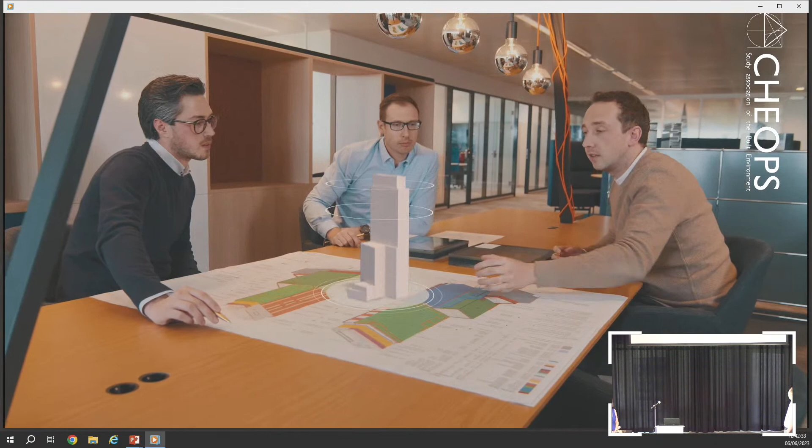City skylines, shaped by iconic statements of modern architecture. Glancing up at these shiny facades often feels magical, but it is not magic that creates these monuments of the future. At Scheldebouw, we know it takes expertise, experience, and devotion to create skyline-changing buildings. Creating something outstanding requires new ideas and tailor-made concepts that make them real. That's why we don't choose paved roads. We think in possibilities. We breathe challenge.

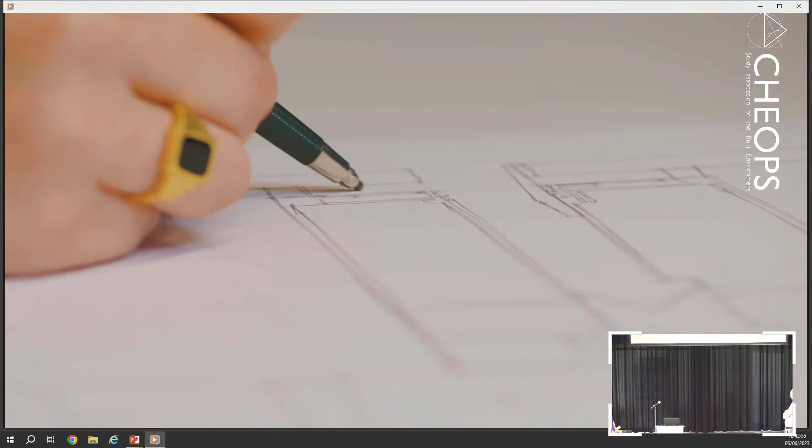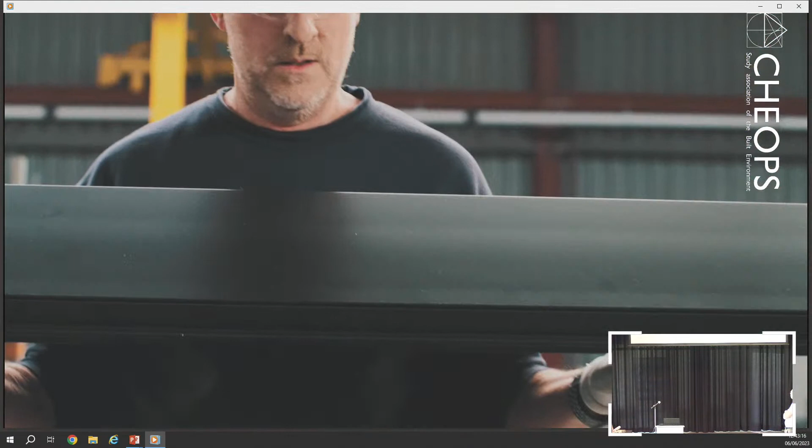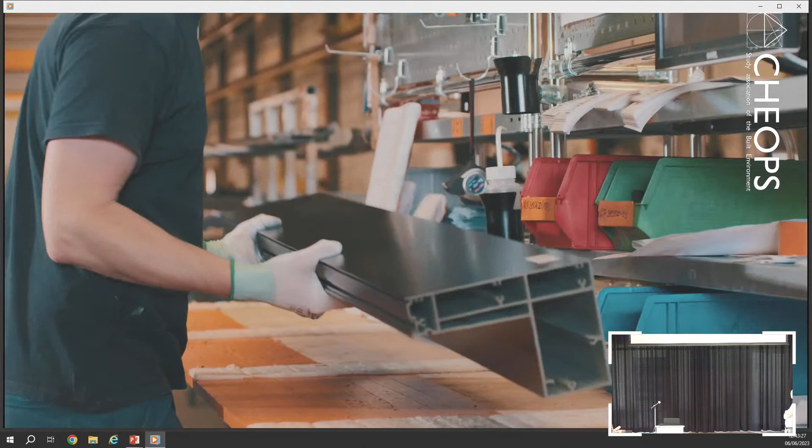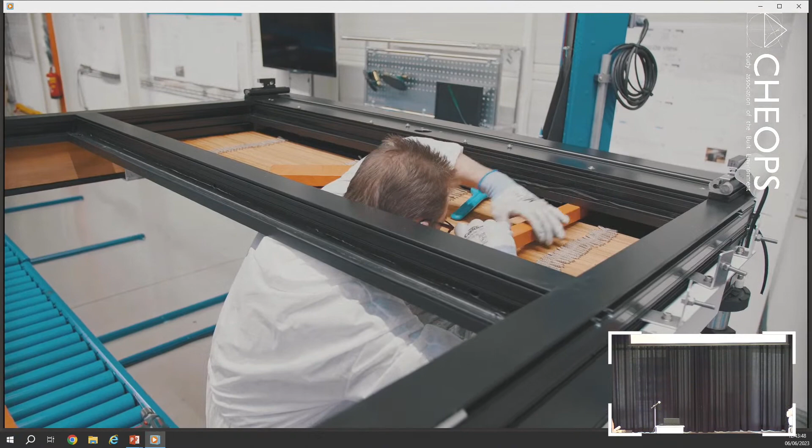And we reshape technology to create new visions. Our engineers design solutions that transform ideas into remarkable curtain walls that protect building inhabitants from the elements outside. We have an uncompromising focus on excellence, and we test our designs in ways that exceed your expectations. At the core of our manufacturing facility lies customization and a commitment to perfection. By tracking everything we do, we keep a tight grip on even the smallest detail. It's this kind of commitment to excellence that is reflected in the exceptional quality of our panels.

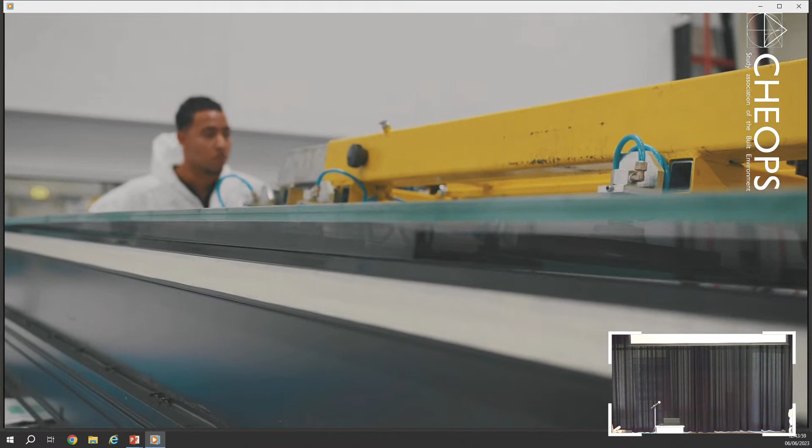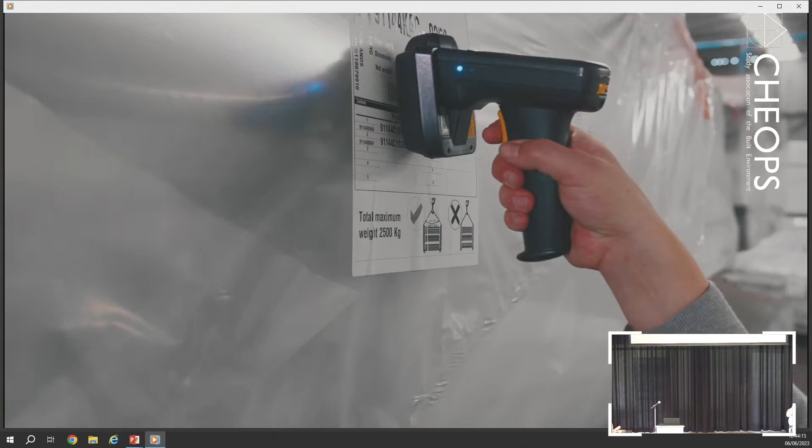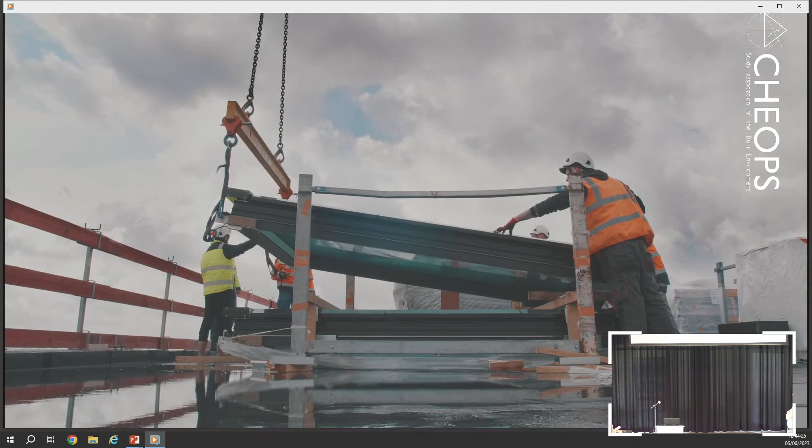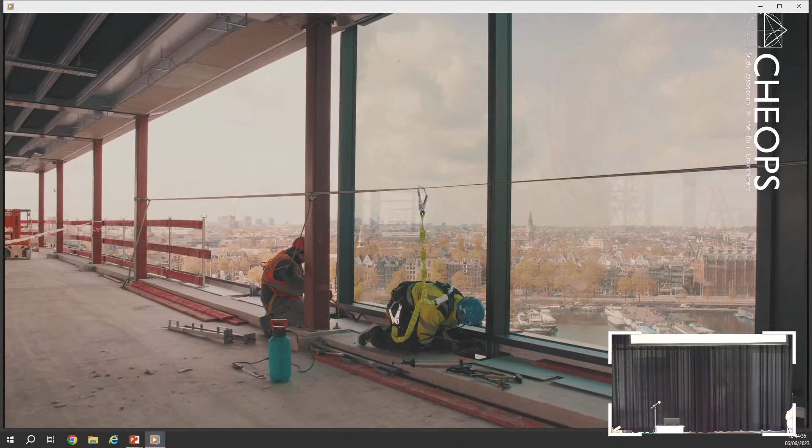In fact, excellence is of such importance to us that our assembly area maintains clean room standards. Driven by perfection, we leave nothing to chance. Our daily quality control makes sure every component complies with our quality standards. Our commitment extends far beyond our facility floors. Our large warehouse allows for meticulous planning on even the largest projects. On-site excellence is just as important to us. Our unitized panel installation minimizes time on site while guaranteeing thorough and precise installation. You might be wondering why we are so devoted to excellence. If the skyline of the future was your canvas, wouldn't you be?

So this shows a little bit what we do. We are part of the Permasteelisa group. This is a worldwide group of companies who specialize in customized facade designs.

So in a nutshell, what we do, we start off with architectural concepts. We discuss with architects, main contractors, developers, and we come up with a plan for them, how to engineer the facade. We source all the materials, we do all the engineering, all the calculations. We do all this in-house. We do all the fabrication, logistics to site, all the quality control, installation, and also the after-sales services. So we really do the whole story, A to Z, full package.

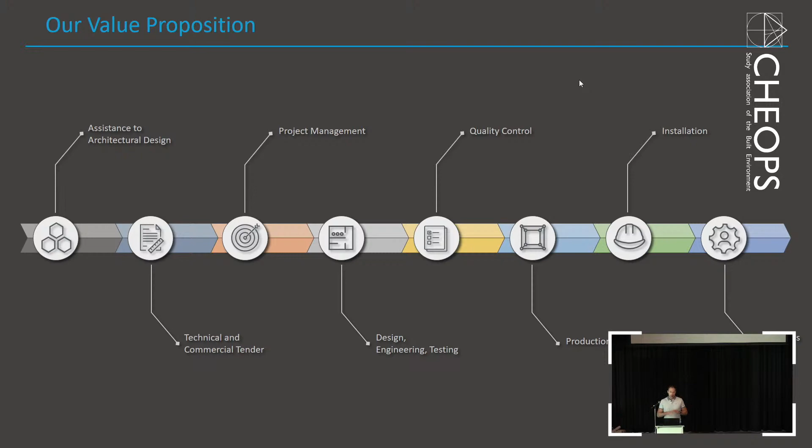Where do we do this? We are mainly, our main market is UK, London. They have most of our portfolio of buildings. We operate actually throughout Northern Europe, Scandinavia, Eastern Europe, Poland, Hungary. And sometimes we also have intercompany projects where we exchange projects in the USA or in the Middle East, where we help our sister companies executing these projects.

Where are we located? We have two companies in the Netherlands. One is in the south, in Limburg, in Heerlen, where we have a design office, and we have one in Middelburg at the coast in Zeeland, where we have production facilities and also engineering capacity. With those two operations, we serve the whole Northern European market.

Maybe making the link to sustainability: what we do is inherently sustainable. We have always done this, and we are tweaking it now to serve new sustainability ambitions on new projects. We only work with customized solutions, so we don't have off-the-shelf products.

Everything we do is fit for purpose for that specific project. We do not design anything that is not required. Everything is exactly for that specific project, with no excess material used—it's calculated exactly to the static and thermal demands.

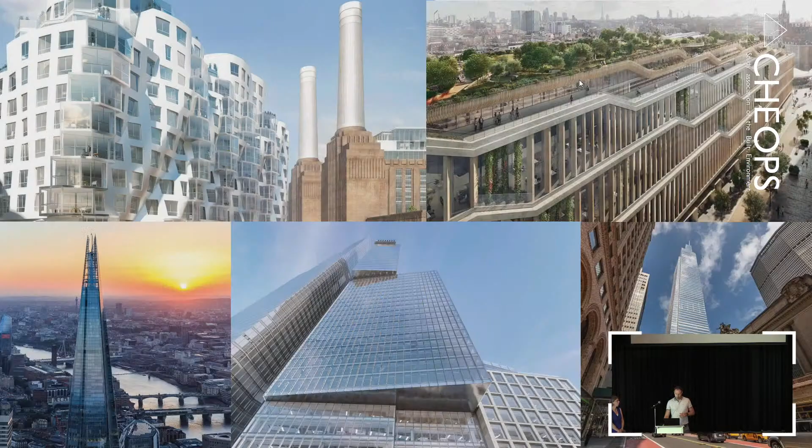The projects we do this for are very diverse. We do not define the principles of the building—the architect does that. Materials are prescribed to us, and we try to work with these materials, analyze them, and maybe offer something alternative to the client. There isn't one single type of project that we service.

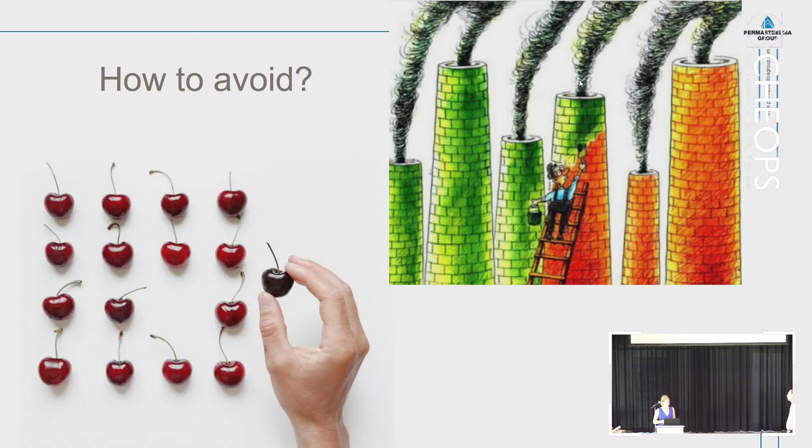And that is something I think we need to be aware of, and that is very hard to judge sometimes. So how do we avoid cherry picking and greenwashing in the world of sustainability? Because I think that is a struggle all of us have, balancing all these effects that maybe go in opposite directions. And it's a challenge we also have as a company.

The answer to that is LCA, a life cycle analysis. Of course, there can be a lot of discussion about the method, pros and cons, how to do this and how to do that. But on the other hand, it is the best method we have in industry. It's widely accepted, there are standards, and of course there's still discussions, but this is a way to balance all the environmental impacts a product has during its life cycle, in a systemized and standardized way.

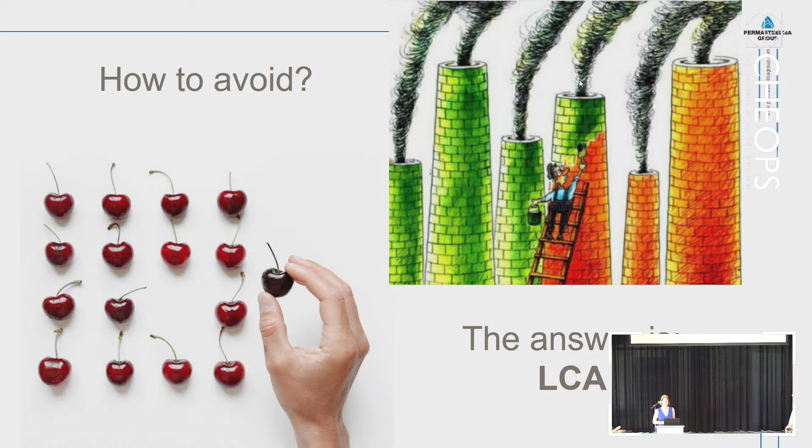So that is why we also embrace this method in our company, but the real challenge I think at the moment is to not let it turn into just another certificate, just another document that you put in your drawer, but how to turn this into action. That is something I think is very important, and I would like to show you how we do that, how we went on this journey at Scheldebouw.

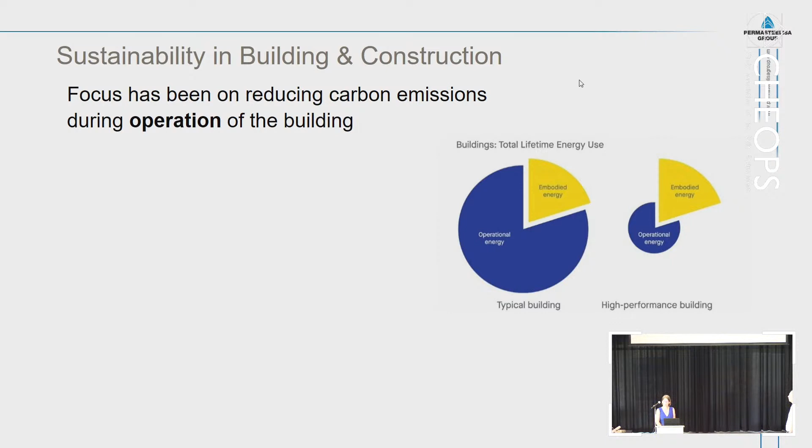So zoom out a little bit. What we saw in the building and construction industry in the last years is that the focus was on reducing carbon emissions during the operational phase of the building, so reducing heating and cooling loads. And we did that by adding thermal insulation, adding solar shading, adding solar panels - in general, by adding material. So we are reducing the energy use during the use phase, but we are adding energy use before the building was there. That is embodied in the materials we used.

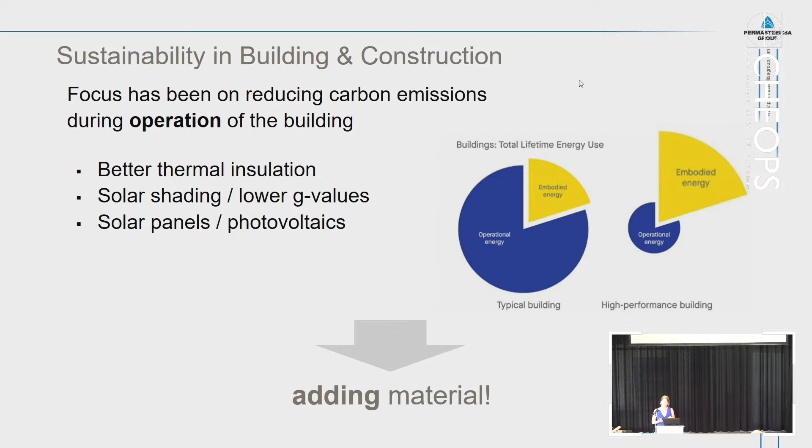So there's more and more attention to that now. That is what we see around us, that needs to be taken into account in the balance.

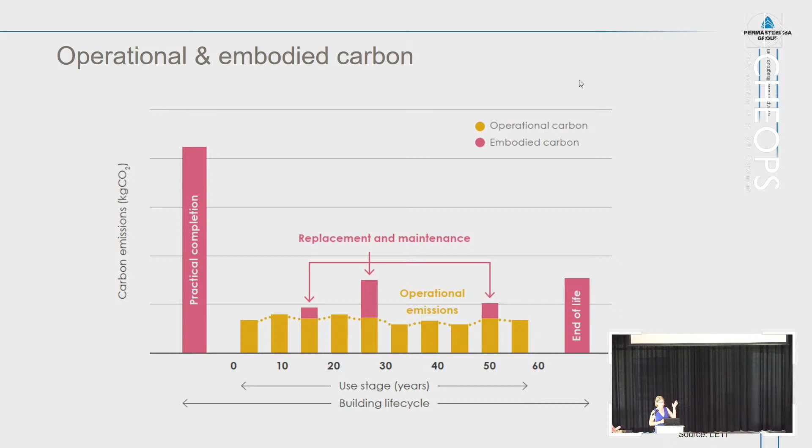Here it's shown graphically. To the left you see all the energy use and environmental impact before the building was completed - that is in the materials. Then we have the use phase. In this case it is 60 years lifespan, and you see all the energy use used to heat and cool the building, that is the orange part. They did it very nicely actually, because you see it varies a little bit over the years, and that is of course because the weather is not always the same. And then you see these pink spikes through the life cycle - those are the replacements of components and maintenance impacts. And then at the end of life in the old economy, the building is demolished and the materials go to their end of life station.

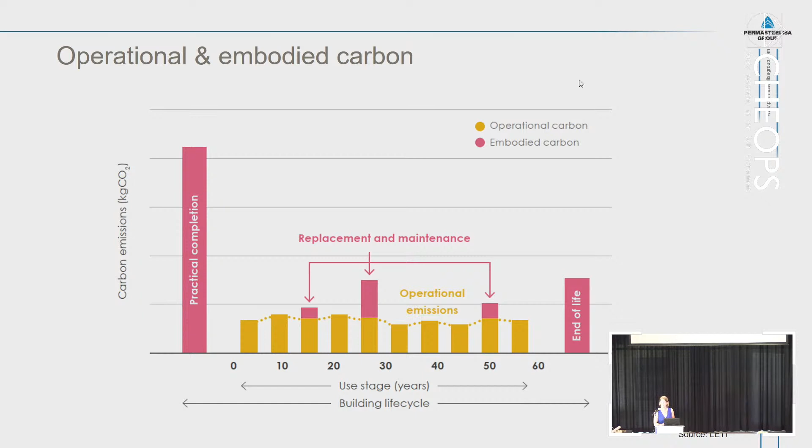So if we as a facade manufacturer want to do a life cycle analysis, what does it take? Well, actually collecting a lot of information. So we need to know exactly which materials are in the facade. You see here the big list with all the material types, kilograms of material in one facade panel. And then you need to know where are they produced, with which processes, how were they transported to our facility in Middelburg. Then for the production facility in Middelburg, you need to know how much energy was used, which processes took place there, how much waste was produced, and then you have the transportation to the building site. You also need to know which activities go on there. And then we need to do this for every project again, because we don't have standard products. We cannot do it once and have a document that covers it all - we need to do it for every project individually.

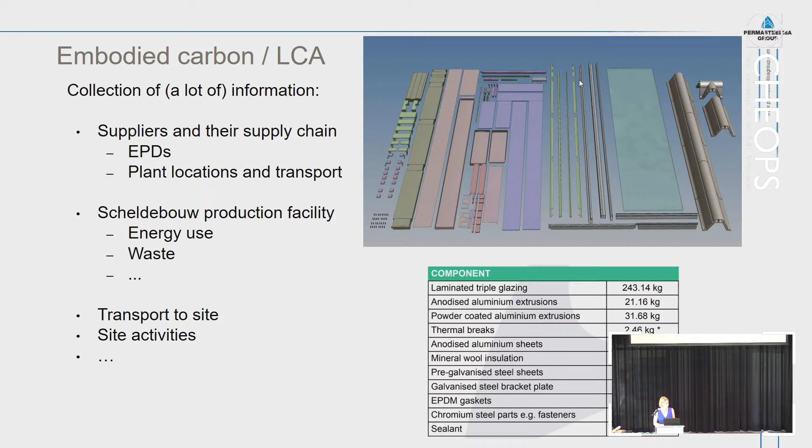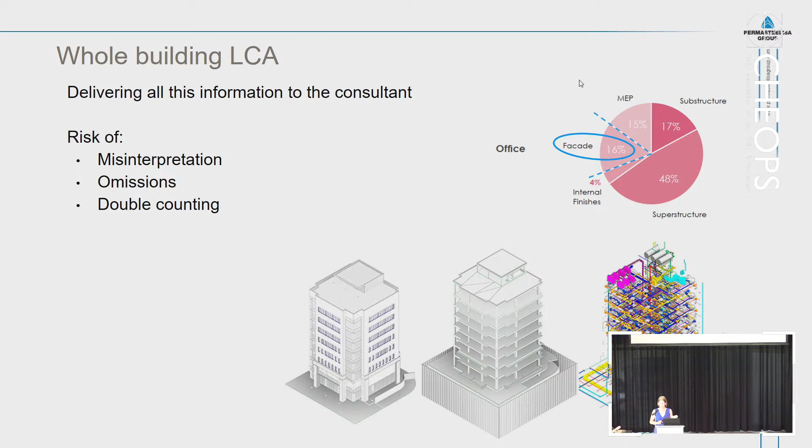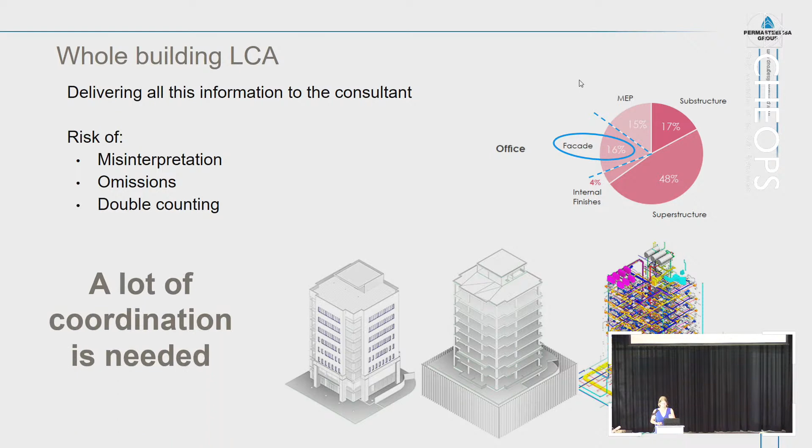So that is a challenge, let alone if you are the client's consultant who needs to do this for the whole building - not only for the facade, but for the complete structure, for the MEP installations, collecting all this information from all the subcontractors and bringing it into one calculation. I think there's a big risk of misinterpretation, or that things are left out, maybe things are double counted. In any case, a lot of coordination is needed.

And that is why we decided at Scheldebouw to take these calculations into our own hand and make one document of it, provide it in one clear overview to the client as a service, but also because we think that we are the ones who know best what's in our product, and this knowledge helps us to advise the client better on the environmental impact and maybe advise them which decisions could make the project and the product we make better.

So that is why we provide this in one document now, and we do that for every project again.

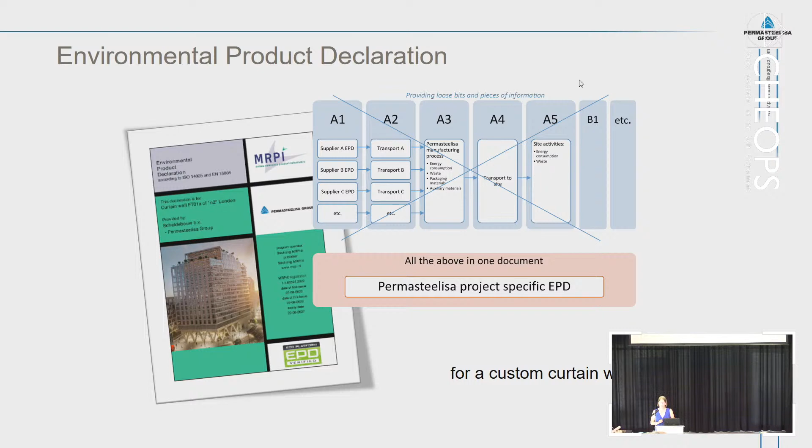But still, as I said, it is not the most important thing to have a nice document that you can put in the drawer, but what can you do with it? I don't know how familiar you are with these EPD documents, if you ever saw one, but basically it's just a huge table with a lot of numbers.

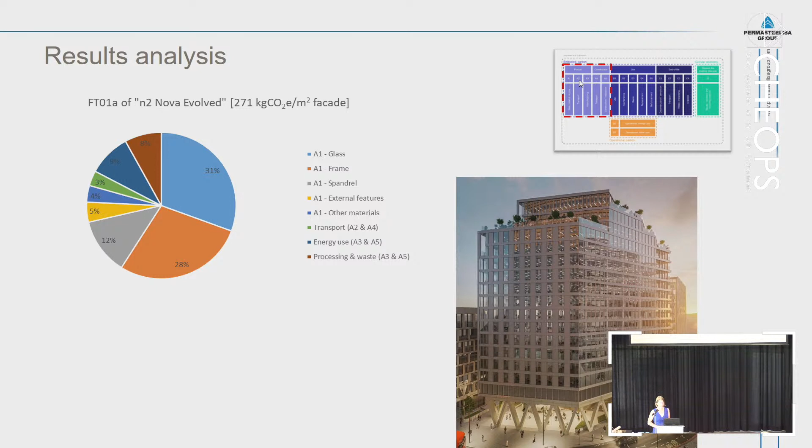I think it's very important to say that this is not the Scheldebouw performance, because we make every project, the facade is specifically for that design. It is based on the choices that were made for that project, and so we first start with calculating what would the impact be if we do not take any specific measures, just take the design of the architect and calculate the impact if we did nothing special, and start from there and see where you can make a difference. So this is trying to define an honest baseline and taking into account everything that is in the facade.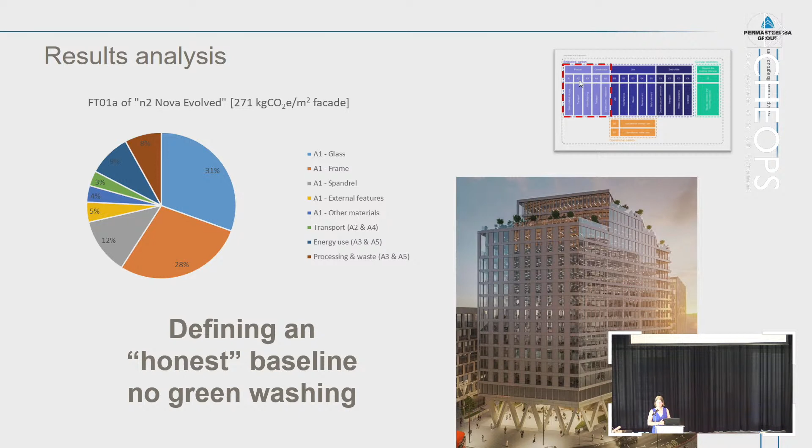But yeah, so one calculation, 271 kilogram of CO2 per square meter of facade. Is that a lot? Then you still don't know exactly what to think of it.

So we first start comparing it. This is 3 different facade types of the same building. So at the top you see vision panels, so most of it is glazing, and a small part at the top at the floor edge is an opaque part with some insulation. Then the next facade type is completely opaque, so you cannot see through it, and the outside is an aluminium panel, then some insulation, and to the inside you have a steel panel. And then the third facade type is a combination of both of them, and also big protruding fins to the outside that were designed to provide solar shading for the building.

So when you compare those 3 facade types, you can see them here graphically. You see that the first 2 are more or less equal in their environmental impact. You see a shift between the glazing and the opaque, but they are more or less equal in total. But the third facade type with the external fins has a much bigger impact per square meter of facade.

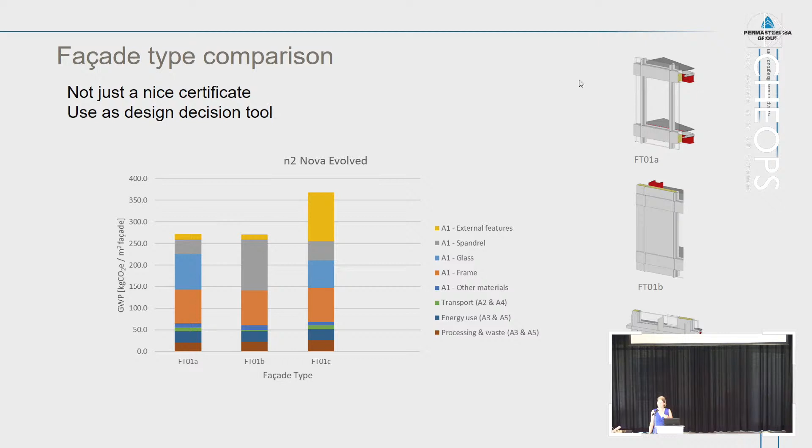So that is something that is very good for us to know, but on the other hand, it was a calculation when the building was already finished, and you cannot do much anymore. So that is nice knowledge, but how can you bring it into practice? How can you use this in the new projects to drive the decisions there? Let me show you that.

So I have here a new project that is just being designed, and we are still working on it, and we have 2 options. To the left, it's a design much like the first one in the previous slide. So it is a vision panel with an opaque part above it, and nothing special added to it, and you see the environmental impact in the left bar. Then to the right, we have another variant with big fins again to provide shading. And you see the yellow part is added in the graph, so that actually adds a lot of embodied carbon.

If then our client asks us what can we do to reduce carbon, at the moment we are seeing a lot of clients talking about aluminium billets that have been produced with lower carbon production methods, and it is actually quite a hype, I would say, that all the aluminium manufacturers are now trying to get hold of these billets and want that in their project. But there's actually quite a limited amount at the moment that we cannot do all projects with those aluminium billets. There's just not enough of it.

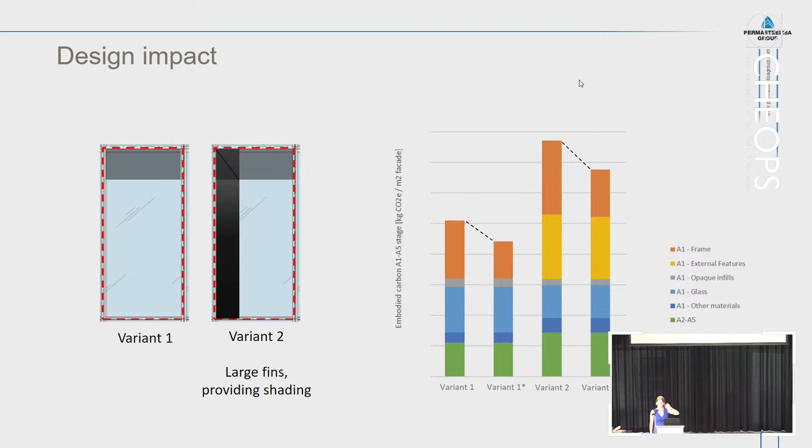So I think this is valuable information for our clients, to show them that you need to start looking at your design first before you look at the supply chain and take these, I would say, last resort methods. So this is something we do for every project, and we look at the specific questions there, which options the client is looking at, because I'm still not saying that the right option is not good, because the fins are there for a reason, maybe to reduce solar ingress in the building, to reduce the cooling loads, and might, if you add it all up, still be a good decision to do.

So it is always a very complicated matrix of all the factors that influence the decisions in your project, that need to be taken into account. You need to know what the client thinks is important, and provide all the information in such a way that they can take their decisions in the best way possible for them. So that is how we use these calculations now in our projects, and we try to influence our clients' decisions into making more sustainable decisions.

I would also like to look a little bit further into the future, because this is not the end, this is just the starting point. Maybe also good to note that if we talk 5 years ago, there was no demand for any global warming potential to get on any LCAs or any EPDs. There was just no demand for that. So all the sustainability ambitions that somebody had was nice, but you could offer this to a project which would only, let's say, be more expensive, and you would never win this project.

Now there are actually performance requirements, just like there are thermal or acoustical performance requirements. There is a certain goal, at least, that you have to aim for. So as a company, you can also be aiming for this, and you can actually be competitive on sustainability, and somebody is actually paying for it. So this really changed the market for us as a new specification that you can actually perform on.

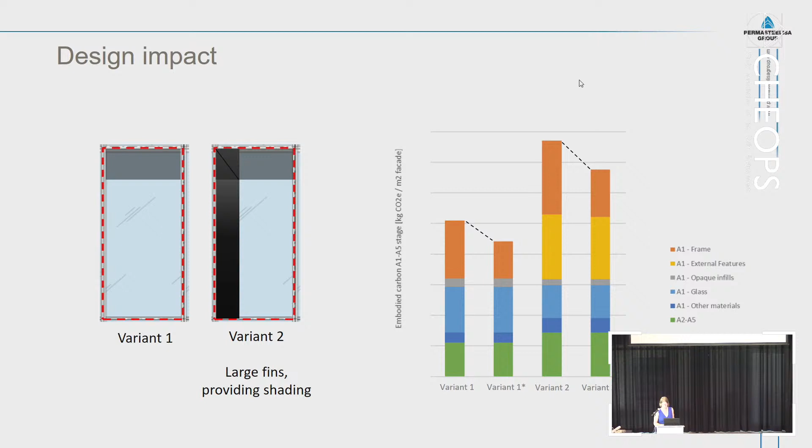But this is only the impact until the completion of the building, that when we hand over it, we hand it over to the client. But of course, the LCA method goes through the full life cycle, and there's a lot more potential to it. So what we would like to do is close the loop, take also the impact in the use phase into account, and at the end of life, try to close that.

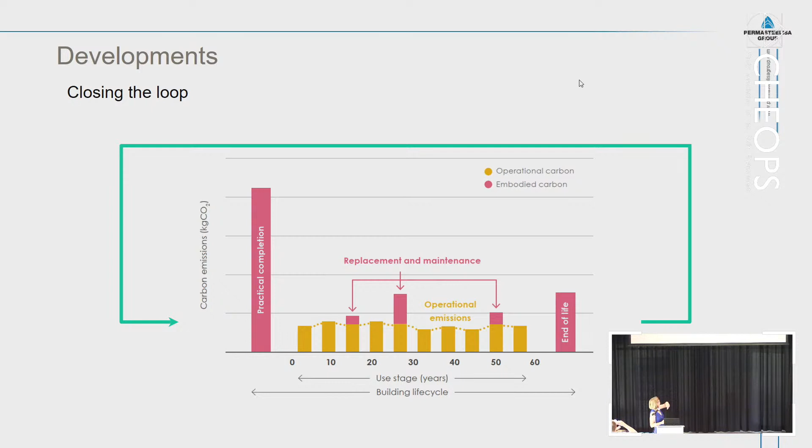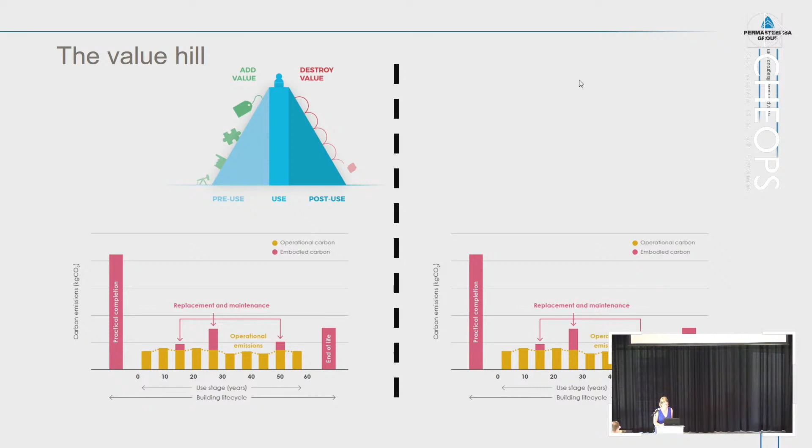Because in the old economy, it was like one EPD, one life cycle here, draw a straight line between it, and start again with a new canvas. And I think that does not hold anymore for the future. So the existing built environment will always be the basis for the new project. So that is what you see here - a continuous cycle of materials, and the end-of-life materials of one project are the resources for the new project.

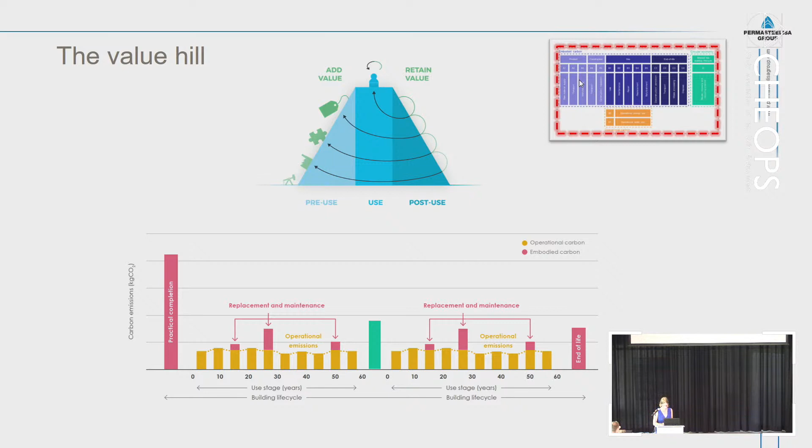We are just exploring this. To be honest, I personally don't believe any person who says they have the solution and they know everything. I think we are all just struggling forward and finding our way how to tackle this. But I'll give you a short overview of the developments we see now.

So these are the options you have if you look into circularity. You could take a full facade, one-on-one, from one building and put it on the next without changing it. That would be a very theoretical option. Another option is taking it apart and reusing the components. A third option is separating all the materials and recycling them. And the fourth option is going to landfill, which I don't think is acceptable anymore.

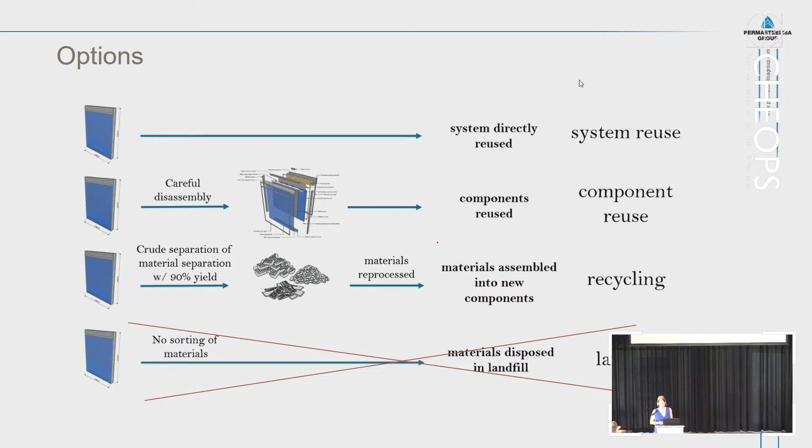For recycling, we see a lot of initiatives already ongoing. We have Alueco, which is collecting aluminium to recycle it. We have Vlakglas Recycling Nederland, who is collecting glass to be recycled. It's actually quite challenging to take materials from a building and give them a new use in a building again. For instance, glass in practice, if you take it off a building, usually becomes beer bottles, because it has too many impurities to be vision glass anymore. That's the challenge these initiatives are trying to tackle, and developments are continuously ongoing.

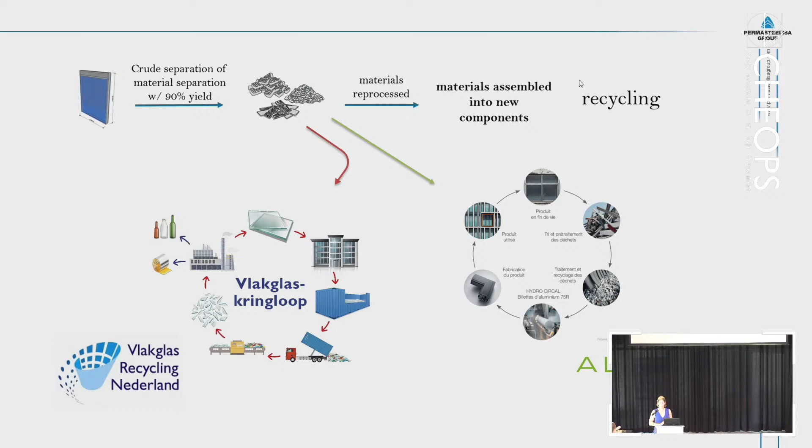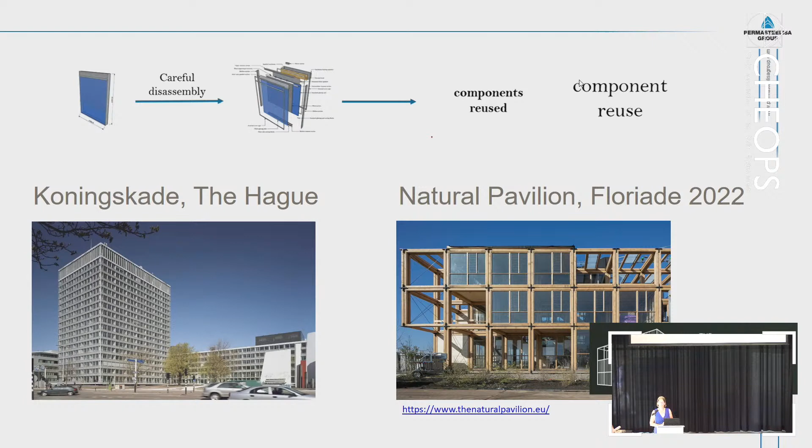Then we have component reuse. We actually have some experience with that. The Koningskade building in The Hague is a building our company did in 1967, and there was a renovation recently. The glass they took off was only for safety reasons, not quality reasons—10 millimeter thick glass panes. They were cut to size and reused on the Natural Pavilion, the Dutch pavilion, at the Floriade exposition last year.

Also the reuse of complete facade panels: the One Triton Square building in London, which our company did in 1996. Those facade panels were taken off, taken to a factory to be cleaned, and then put on the same building again, but one level higher.

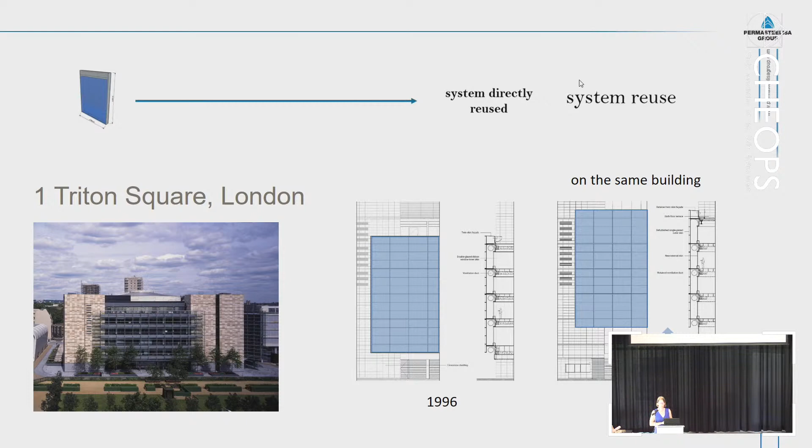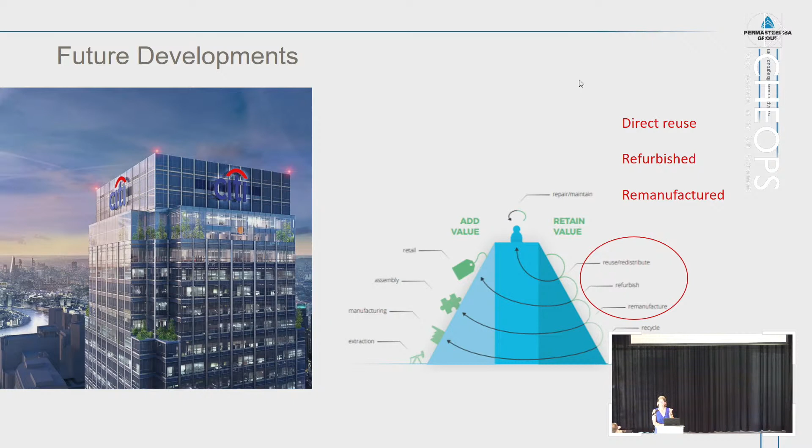That was quite revolutionary, and I think there's a lot more to come in this sense. Because our company is used to using different materials on every project, setting up a new factory line for every project, I think we are really fit to take an existing facade off a building and tailor it for a new purpose—take it back to the factory, take it apart, clean it, replace some components, maybe cut it into a different size, and make it fit for a new building. I think those are very interesting developments, and we'd like to see more of that.

So why not make it into a tiny house or a new, smaller office building? The Citi Tower building on the left is the Citibank in Canary Wharf, London. They are currently renovating this building, and the owner decided not to take off the complete facade, but just a few elevations in the middle, a few at the top and a few at the bottom—keeping the rest in place, since that facade is still good. They're only replacing it there with a different facade because they want a new look and feel, since working in an office has changed quite a lot in recent years. That's their goal, and they decided they don't need a complete new facade for the whole building.

So the facade panels coming off—it would be very nice if they could get a new purpose, a new destination somewhere, and not be thrown away as waste. But we don't have the solution yet.

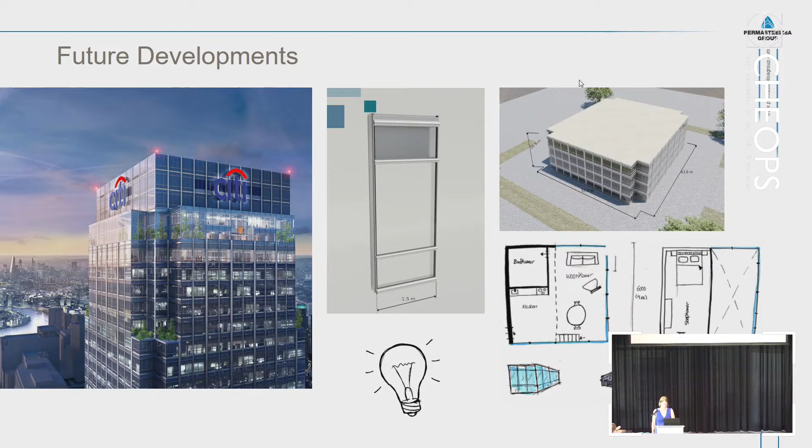So I think this is a big challenge for all of us, and I'm coming back to where I started. I think our queen can be a big example for us and for our clients, because we have a responsibility to show the world that it's not necessary anymore to buy everything new and throw it away, while still looking good. Yeah, so that was it.